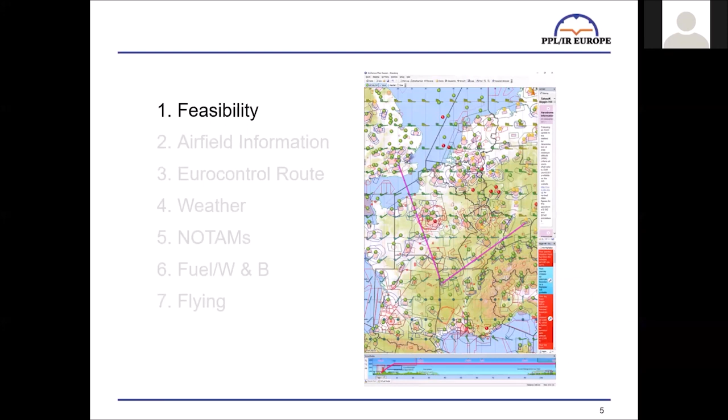First step is just the general feasibility. Can the flight be done given the fuel and the weather and distances and so on? Secondly, airfield information - things like customs availability, opening hours, fuel availability, that kind of thing. The Eurocontrol route, which historically has been the most difficult thing about flying IFR in Europe, but now has been made very easy by various tools.

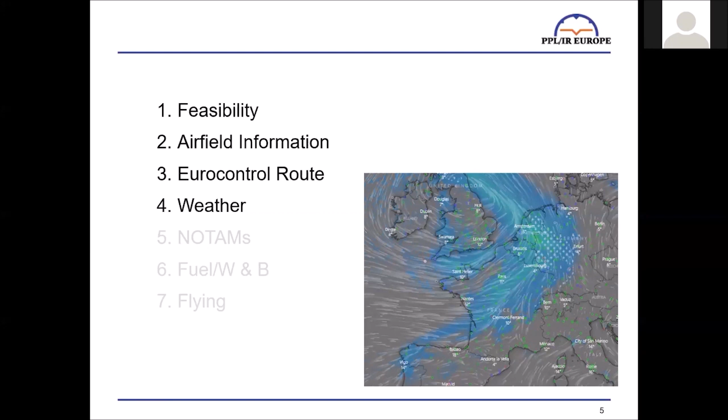Weather, and we'll talk about that and how easy that's been made by various tools. NOTAMs, same thing, used to be a huge problem, now it's made very easy by various tools. Sorry to keep repeating myself. Same thing with weight and balance. And then we'll talk a little bit about flying at the end.

So, taking a scenario, let's say the boss calls me up and says, right, I need to fly from Bingen to Stuttgart, dropping my wife in Clermont-Ferrand with a quick turnaround. What time can I set my meeting up in Stuttgart? That would be not an untypical thing for him to say to me at 7:30 in the morning, expecting to be a meeting in Stuttgart by the early afternoon.

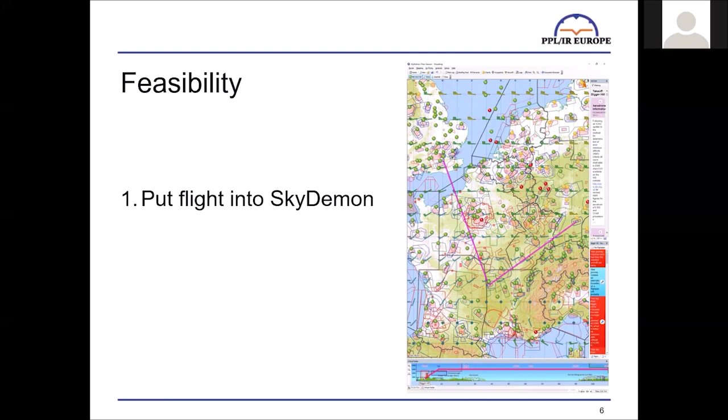So the first thing I do is I just put the stopping points into SkyDemon. Well, in this case, I'd probably put Bingen to Stuttgart and then rubber band it to Clermont-Ferrand, just to get an idea in my head. I'd look at the log and get the times and distances from that. And then I just add on.

I know that Eurocontrol is unlikely to add more than 15% to my route, and indeed, as we'll be talking about later, I'm unlikely to fly even that 15%. So I have 15% for Eurocontrol, 30 minutes on the ground, 70 litres for climb, 200 litres for hold and alternate. And I come out with a feasibility answer, a yes or no, generally speaking, in about 60 seconds.

So he calls me up, I say, hold on a second, blah, blah, blah, blah, and then, yeah, I think we can do that.

What would typically happen is he would say, okay, plan it and let me know when we're going. So the first thing I do is go to the airfield information for those airfields. There are lots of places to get it from, flight planning apps, websites, Acukwik, Jeppesen, many places. But they all use the AIPs as their source material, which is already at your fingertips, in my case in SkyDemon, but in various places you can see the AIP.

So I tend to go back to the source material. On my SkyDemon, I keep the whole of Europe offline, already downloaded on the iPad, so it's just there whatever the circumstances, both in flight and if I'm in a poor signal area. I have to remember to do it for departure, destination, and alternate airfields.

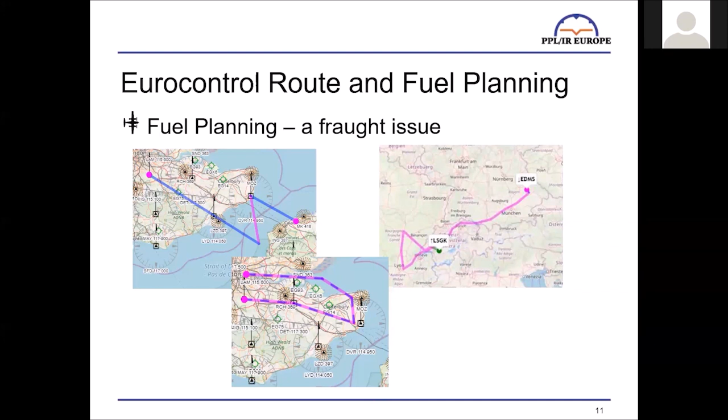This only really matters if you're doing a long route. But for example, I planned a route from Liverpool to Gdansk, and the route took me a very odd way over the North Sea, which I didn't have enough fuel for, but it was perfectly clear that I would get a straight line across the North Sea, which I would have fuel for. So it can become a real issue that you have to take decisions about.

Windy.com is both a website and it's available on apps, and it's free to use, and you can set it up to have aviation weather. For example, the things I'm about to show you - rainfall, visibility, cloud base and wind, the four main things we're interested in - you can set it up to show those. You can also set up pickers to show you what the forecast is at a particular place.

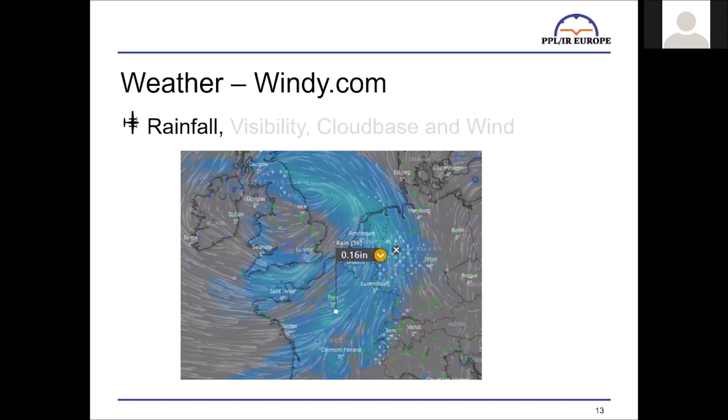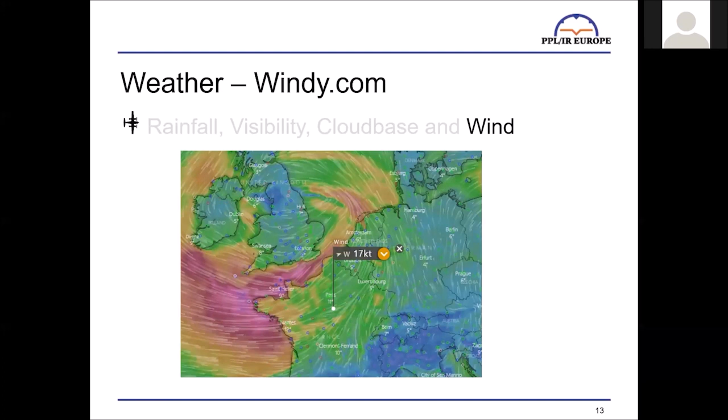And then you have a time slider scale, so you can see how the weather system is moving and so on. In this case, I can pick up the rainfall, the visibility, the cloud base, and the wind. The wind one can do at any level or altitude you choose, including the surface. So you get a very good picture both of en route winds and any likely problems with wind at departure and destination and alternate fields.

So windy.com, as I say, it's available on website and in apps. It's free of charge, and as far as I'm concerned, it's completely changed how we do aviation weather. It enables you to visualize and see how systems are moving, so you can decide it's better to go in the morning than the afternoon, or whatever it might be.

The second system that has enabled us to visualize weather is Gramet. There are a couple of possible sources of Gramet. The one I recommend is from Autorouter, and it comes free with Autorouter. If you've done your flight planning through Autorouter, it automatically picks up the plans and routes. For example, if you put in your route 4 or 5 days in advance, you can keep an eye on it just by putting in Gramet route 1, or whichever number the route is, over the days, and it shows you if there's any change.

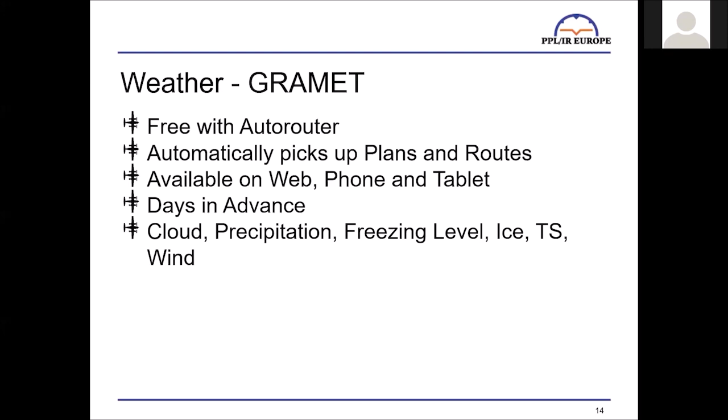And when you've put it in as a plan, you just say Gramet 1, and it automatically gives you the Gramet for your plan. It's available on web, phone and tablet, and you can do it days in advance. It gives you cloud, precipitation, freezing level, ice, thunderstorm activity and wind, all in a cross section like this. This particular one is going from Fair Oaks to, I think that's Gstaad, and you can see the weather that you're likely to be climbing up through and then flying in.

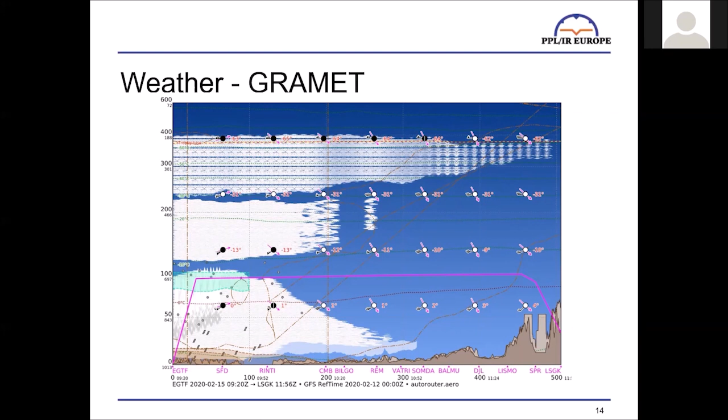The green area is icing, the little parallel lines are rain, and you can see magenta lines for the track compared to the forecast wind. Hugely valuable resource, enabling you to picture what the flight's going to be like, and usually pretty accurate, not 100%, but pretty good.

And then finally, the Golze system, which is both for pre-flight and in-flight weather. You have a little box, either which you carry into the cockpit or is installed in the cockpit, and it gives you TAFs, METARs, precipitation, cloud, lightning, wind and temperature. And on here you see an example.

If you have it plumbed into the aircraft, then it also gets your route from your navigator and puts that on. That's what the green line is. And this is showing magenta is lightning strikes, red and purple and yellow, orange and so on are amounts of precipitation. The grey is cloud without precipitation.

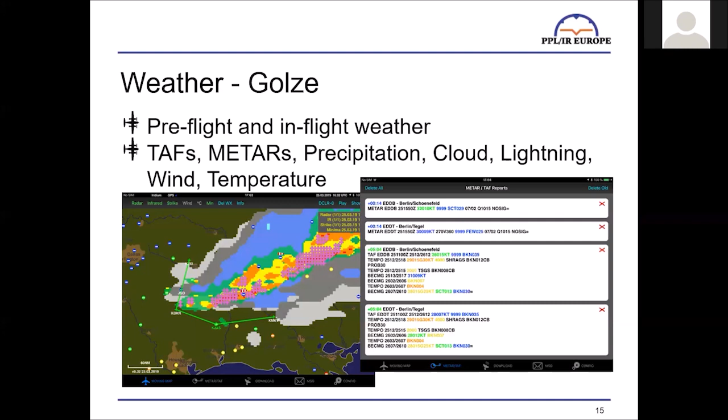It also gives you wind at different altitudes as well as temperatures, and you can pick up TAFs and METARs. It's a very, very well engineered product. Although it works on Iridium, which is an expensive technology, the author, Sebastian Golze, has done an excellent job at compressing the data so the costs are actually relatively low. I fly a lot, and I very rarely have a monthly bill of more than about 30 euros, and that's flying a lot. If you just do the occasional trip, it will almost not be noticeable.

Do beware that the radar data is always out of date. It's a minimum of about 4 minutes out of date, and depending on where in the cycle you're looking, a maximum of about 20 minutes out of date, because there's a download every 15 minutes that takes 4 minutes to process. So the first time you see it is the situation as it was 4 minutes ago, and then as the 15 minutes decay, it becomes older and older. So you can't use it as a tactical way of avoiding thunderstorms, but you just know where they were between 5 and 20 minutes ago.

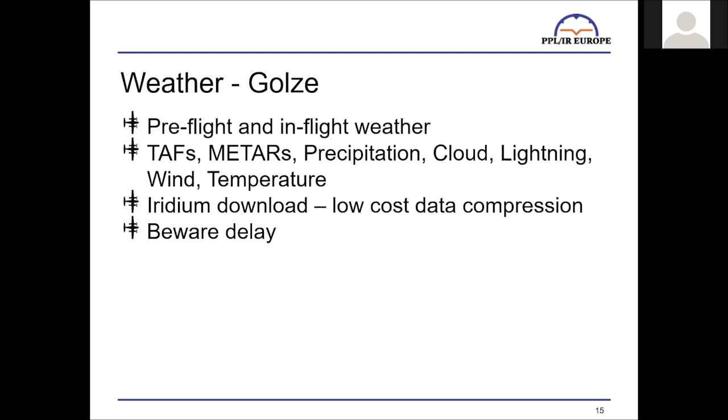It gives you low-cost in-flight SMS texting as well, so if you want to text home and give an ETA or whatever, you can do that. In my opinion, it's the best thing and the best value addition to the IFR pilot's toolkit for many years, and I recommend everyone to have one of these boxes. I'd almost say it no longer makes a lot of sense to do IFR touring without one, and they're not hugely expensive, a small number of hundreds of euros, so very, very well worth buying.

And I should say, I have no interest in the company.

I'm just a satisfied customer, so I'm not pushing it from a commercial point of view. I'm just recommending it as someone who thinks it's wonderful.

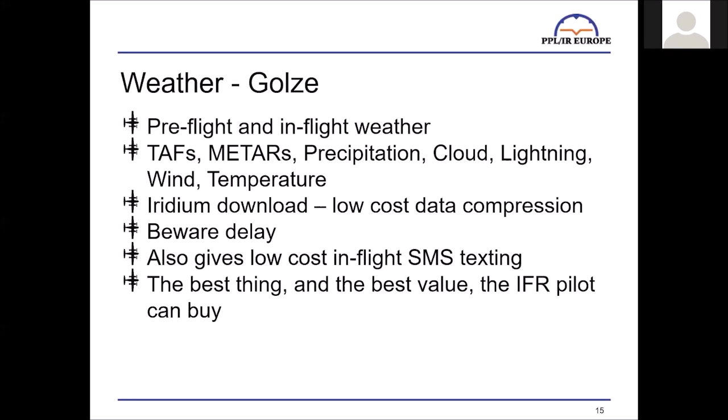Moving on to NOTAMs, I get graphical and textual NOTAMs from SkyDemon. There are many other sources for getting them, and all the flight planning programs have them, some better than others. Some only show lateral extent, whereas SkyDemon and others also show you the vertical extent.

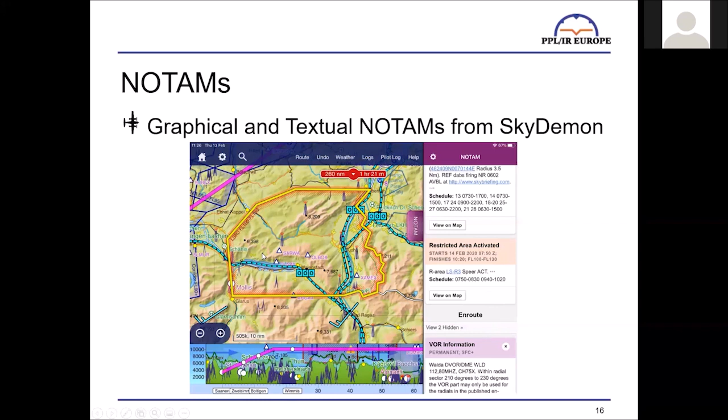They're timed, so you can see when they're coming in and going out, and it's a very easy way to look at your whole route. For example, in this one, you can see my magenta line goes here, and I've come down and had a look at what this NOTAM is about. You can see the words down here, but if you put the mouse over them, they pop up the contents. So it's made NOTAMs go from an hour-long exercise of sitting in the crew room reading hundreds of pages of tightly printed A4 sheets to just having a quick glance at the graphical view, seeing which ones are relevant, and moving on.

Also, using SkyDemon, and I'm sure the same is true for many other flight planning and in-cockpit flight systems, they provide in-flight alerts and warnings. So just like they tell you about controlled airspace, they'll say you're approaching a NOTAM and warn you what it is.

Fuel and weight and balance. Again, many apps—SkyDemon, RocketRoute, AutoRouter, ForeFlight—give you weight and balance calculations, and I'm sure they're absolutely fine. Personally, I use Excel because I've programmed it myself, so I know exactly what it's telling me, and I'm not relying on other products to do it. That may just be paranoid on my part, but I like to know exactly what I'm looking at.

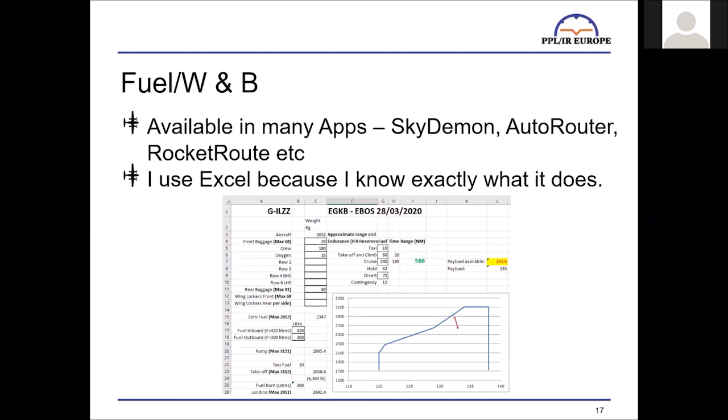But all of them are much the same. You can see the red line shows me takeoff and landing weight and balance, and shows they're both within the envelope. Many apps do exactly the same thing, and you may prefer to use one of those. It's just me that likes Excel, but I can do it very quickly—probably a tiny number of keystrokes, because things like my own weight and my flight bag are already in there.

So it's just a question of putting in, and I normally take off with full fuel, so it's usually just passengers and their baggage, and we're off. I also save what I've done so that if I'm ramp checked, I can show the ramp checker that I did the weight and balance and that it was in limits. The whole process takes about 15 seconds, as opposed to the many minutes it used to take when I was doing this commercially, with everything on paper and multi-carbon sheets.

In my personal experience, slots are becoming more common, probably due to the shortage of ATCOs around Europe. Having said that, we're currently in lockdown with almost no aviation activity in Europe. What will happen when everyone comes back from furlough—whether it'll be better because there are fewer airliners, or worse because there are fewer ATCOs—we don't know. But going historically on the way it's been over the last couple of years, it's getting increasingly common to get a slot.

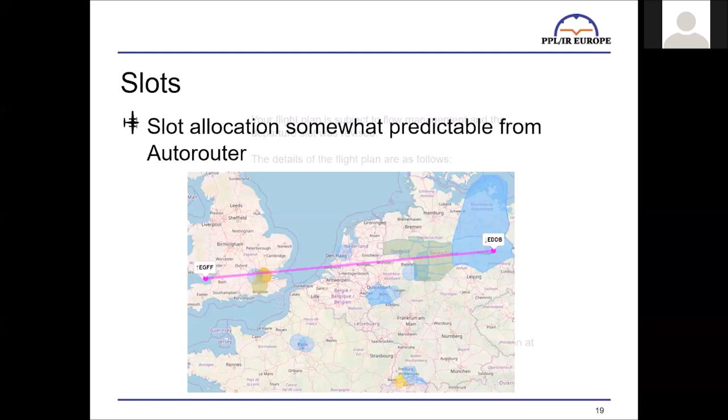AutoRouter does warn you about where potential restrictions would be. Each colour represents a different length of time, from maybe 10 minutes to 2 hours or so, depending on the strength of the colour, so you can get a rough idea of what the restrictions would be. In this case, you could possibly plan a route further south to avoid those delays, but even further south you've got that area between Koblenz and Düsseldorf, so it may or may not be worth replanning.

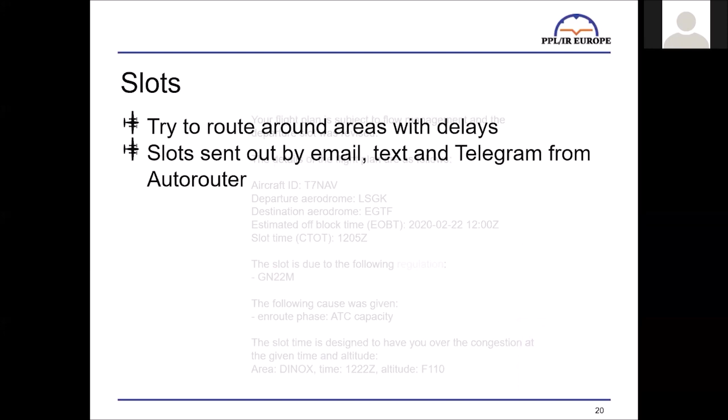Slots are sent out by email, text, or Telegram from Autorouter. I'm sure each of the systems has its own way of sending them out.

Just to warn you, if you get a slot - let's say you're planning to go at 12 o'clock and you get a delay until 1 o'clock - if you try to be clever and refile for 11 o'clock hoping you'll get a delay back to 12, the system seems to know better and will give you a delay till 1:30 or whatever. So filing an earlier time, having already filed, is not usually a good idea.

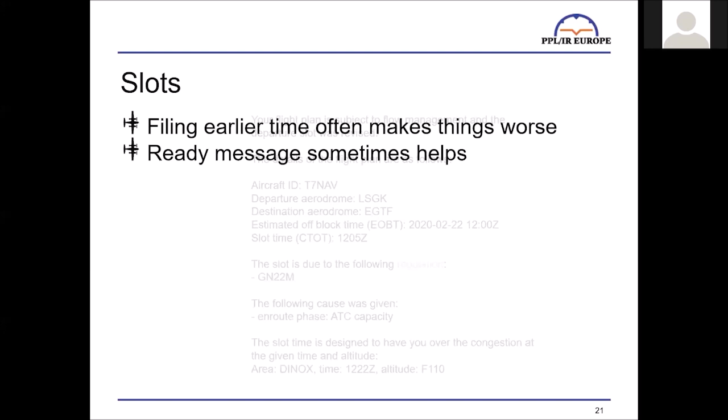Doing it based on what Autorouter tells you is the likely delay might be a better idea. And sometimes sending a ready message - you can do it directly or through ATC - that sometimes improves the slot, though it often doesn't.

I won't say annoyingly, because it's sometimes helpful, but quite often you'll get a whole series of slots. First you'll be told there's an hour's delay, then 45 minutes, then 30 minutes, and then you'll get one saying you can go now.

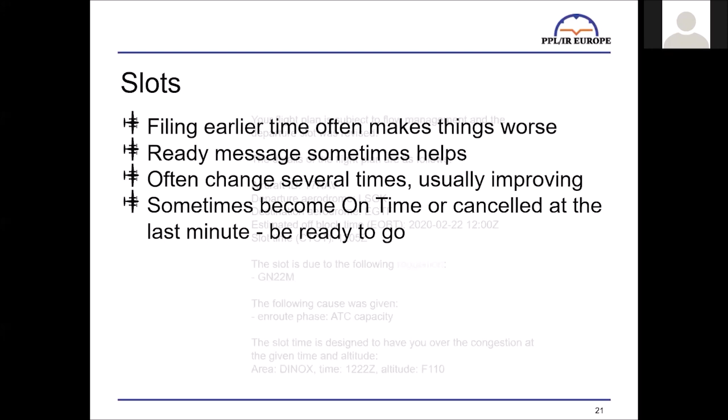If you're ready to go, sitting there ready to start the engines, that's fine. But if you've let the passengers go off to the cafe, it's more of a problem.

So you can freeze the slot if you want to. Let's say you've got a delay of half an hour - you can put in a freeze command, which means you can just tell the passengers to be back at a certain time, ready to go for the slot. It's horses for courses - you make the choice for each flight as circumstances suggest.

You can always consider, depending on the weather, route and circumstances, if you get a very long delay. Historically I've had a 5-hour delay, which actually makes the whole trip not worth doing.

Then you can consider cancelling IFR and refiling VFR, which, given all the facilities offered by SkyDemon, isn't such a silly idea, depending on your aircraft type and the nature of the airspace. But if you do that, bear in mind it'll be a much more tiring flight, as you're working out as you go the restrictions, airspace, who to talk to next, and all the things IFR protects us from.

Now, talking about the flying itself, some people are nervous about ATC. My experience of ATC is that, although there have been some exceptions in my long history of flying, mostly they are helpful and cooperative.

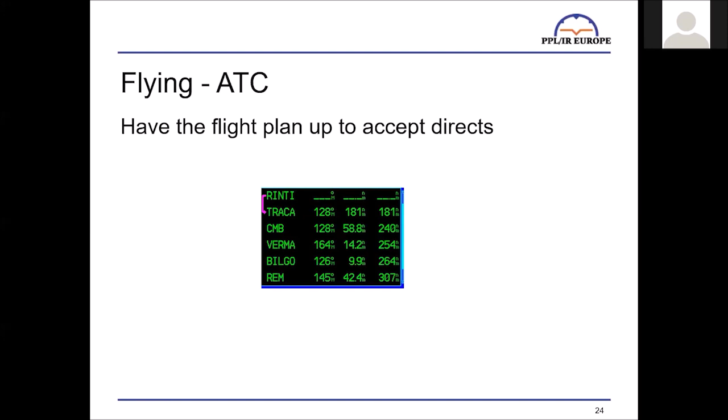The downside is, of course, you have to be ready to accept the directs, and I strongly recommend having the flight plan up on your GNSS unit, so that if you're flying from RINTI to TRACA, as we are here, and you're told direct to Reims, you can just highlight it, click direct, and off you go. That's always the first place to look when you're given a direct - your GNSS flight plan.

A problem can arise, particularly when you're listening to a controller whose language differs from yours and who might have an accent, as to - if you're not familiar with all the waypoints, or it's an unusual waypoint - what have they actually said?

So on the radio, SAMAX, XAMAX, SAMAC and SANAC all sound pretty similar, and so there can be confusion, either because two of those exist or because you don't know which one you're looking for.

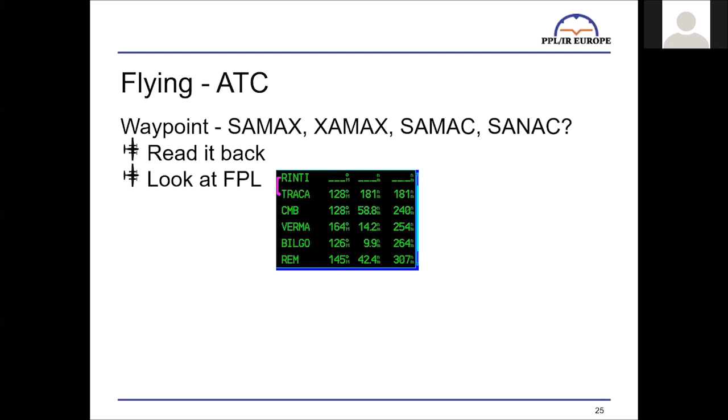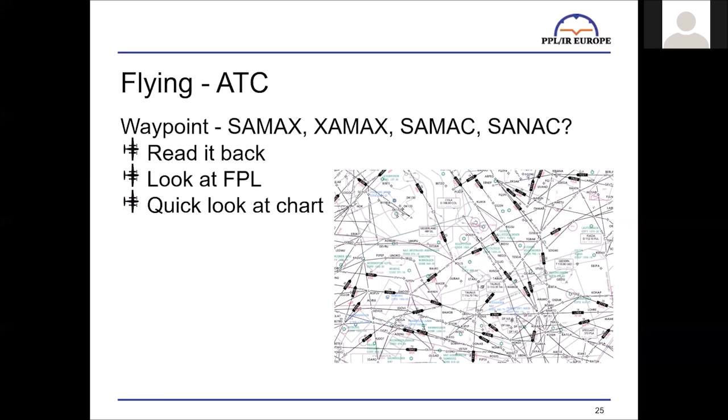The first thing to do, in my suggestion, is read back what you've heard, because ATC can be quite busy and you don't want to take up unnecessary time. If you can work it out for yourself in a few seconds, so much the better. So read it back, look at your GNSS flight plan, can you see it there? If you can't, look on the chart in the general direction where you expect it to be, towards your destination, and have a quick look round to see if it's an obvious place. And then finally, go back to them and ask them to spell it.

They never mind spelling it, it's never an issue. You just go back, ask them to spell it, they spell it out, you put it into your GNSS as a direct, start flying it, and then once you've started flying it, you can find it on the chart, see where in your flight plan it should fit, and insert it into your flight plan, at which point the aircraft will automatically go from direct to sequencing within the flight plan.

That's something that comes up very often in new, inexperienced IFR pilots, is what to do if you're just given a direct to a waypoint and nothing beyond it. Some people think they're supposed to hold when they get there, but that's not the case. If the flight plan's on the route, on your original route, like in this example here, then you just continue on the flight plan route. That's what ATC is expecting you to do.

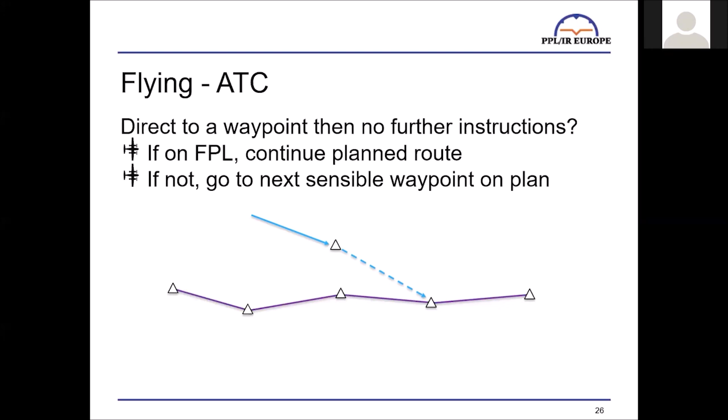If it's not on your route, then unless you hear any different from them, just continue to the next sensible waypoint on the plan. So in this case, continuing in more or less a straight line to somewhere a bit further on the plan. You wouldn't do a hard right turn to join the plan adjacent, you just continue. That's what they're expecting. But of course, if in any doubt, ask what they are expecting. Generally speaking, it will be to a point on the flight plan, and you just continue on your flight plan route until you hear otherwise.

Just a little bit about large TMAs - London, Amsterdam, Frankfurt, places like that. Expect a lot of vectors, particularly in all three of those, but I'd say particularly in the London TMA, you just never fly the route you plan, it's always vectors. A couple of years ago, I was given a SID out of Biggin Hill and I flew it, and I was never given a vector. It was so surprising, because that had not happened to me in the previous 30 years, that I actually had a conversation with the ATCO about it.

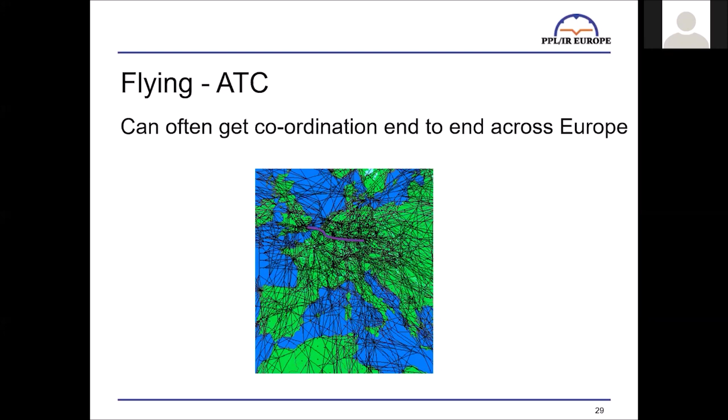Some ATC provides weather assistance, particularly in Germany, but there are other places too, where if asked, they'll say there's a CB on that route, or suggest you turn left, or whatever it might be. It's not usually offered, but if you're short of fuel, you can ask them to coordinate for your whole route, asking their colleagues further down the line if you could go via a certain point to get in a straight line. If the answer comes back no, you might want to think about diverting. But if it sounds like you'll get a direct routing, you can get reassurance about that. It doesn't always happen, it's horses for courses, but it's always worth a try.

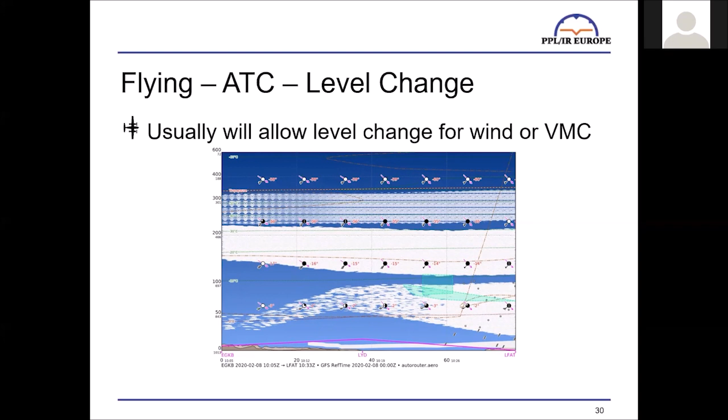Usually, particularly at our levels where there isn't a lot of traffic, you can ask for level changes. You must never make a level change unless you're cleared, but you can ask for one either because you've got a much stronger headwind than expected, or to take advantage of a tailwind, or to stay out of bumpy cloud for your passengers' sake, or to avoid icing. So you usually can ask and will be granted a level change in the kind of levels we're talking about, between 80 and 240.

Sometimes in busy TMAs, there just isn't the time or capacity for that. Bearing in mind the big jets are down at our levels too in the TMAs, you just have to suck it up and take the levels you're given, unless you're actually icing or risking very serious turbulence.

Another thing people often ask about is descent and how to liaise with ATC. You need to plan your descent a way back, either using technology—for example your navigator may have a mode where you say, I need to be at this level by this position, and it tells you when to start the descent, which is quite common these days—but with older tech, you need to do it by mental math.

Unpressurized aircraft need to descend at a minimum of 500 feet a minute—that's the IFR rules—and you don't want to exceed that for your passengers' comfort and ears. Therefore you should plan all your descents at exactly 500 feet a minute. Obviously that doesn't apply to pressurized aircraft.

The way you do it is you calculate the altitude change you require. At 500 feet a minute, that's 2 minutes per 1,000 feet, so you get a number of minutes. Let's say you need to go down 5,000 feet, that's going to take 10 minutes. You know your speed, say 120 knots, 2 miles a minute, so if you have to go down for 10 minutes at 2 miles a minute, that's 20 miles, or whatever it is. You can work it out quickly and get the point from which you want a descent.

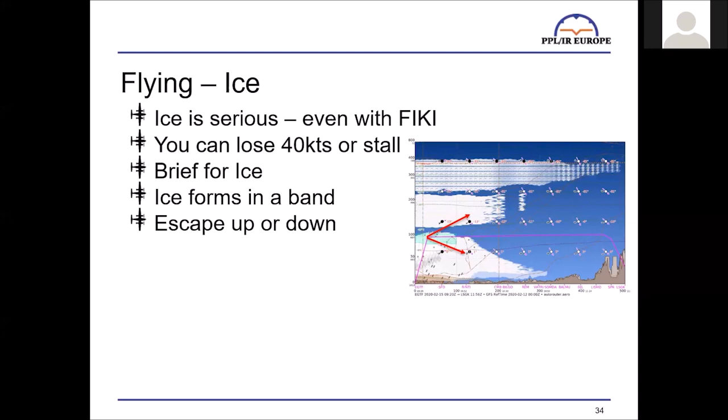So there's only going to be a few thousand feet which is ice-bearing, and therefore you can escape up or down. You should always consider - if, for example, you can see blue sky above you, that may be the better way to go. And if you've picked up some ice in the green area and climb above it, the ice will sublimate off in the sunshine. It's not a question of it always staying there because it's colder - it will dissipate, but slower than if you descend below the 0-degree isotherm.

Generally speaking, if you say you are icing, ATC will take it very seriously. You don't have to declare urgency or emergency. But if they don't take it seriously, or your situation is beginning to get grave, don't hesitate to declare an emergency - it is an emergency. If your aeroplane isn't flying properly, it's an emergency. And once you declare an emergency, they will essentially do for you whatever you need in order to get you out of it. There will be paperwork to do afterwards, but paperwork is always better than crashing and dying.

Something I sometimes see people forgetting is to put on anti-ice and de-ice measures when they should. It varies from aircraft to aircraft, but make sure your pitot heat is on, prop heat, alternate air. It's easy enough to remember to do the wing de-icing, but do remember for your own aircraft type what else you need to have on.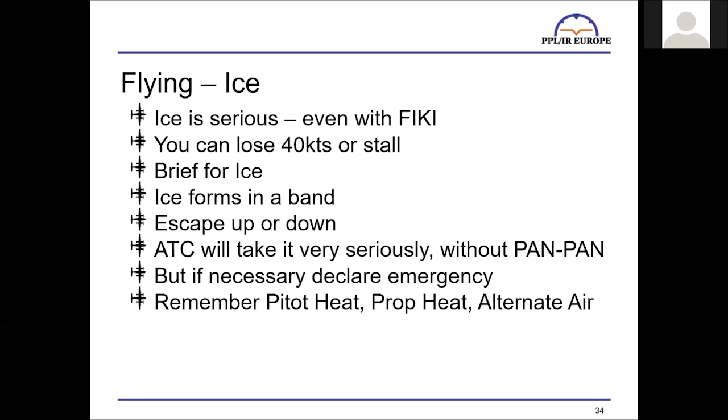A little bit on thunderstorms, because that's another big worry when we're flying IFR. Use some kind of detection.

If you're above the clouds, then you could - and this is the most common way to interact with a thunderstorm - see the kind of picture you see here. But otherwise, onboard radar, the Golze system I mentioned earlier, storm scope, or as I said earlier, in some countries you can ask ATC. But one way or another you need to know where they are.

Remember when we talked about the Golze system, I mentioned there's a delay. There's a play function within Golze that allows you to watch which way thunderstorms are moving, so you can forecast for yourself. If it was there half an hour ago and a quarter of an hour ago, in all likelihood it will be here now. It's not great, but it helps. But also remember that in some places, particularly in the Swiss Alps, or the Alps generally, thunderstorms don't move - they just appear and disappear in place. So the play function isn't going to help you with that.

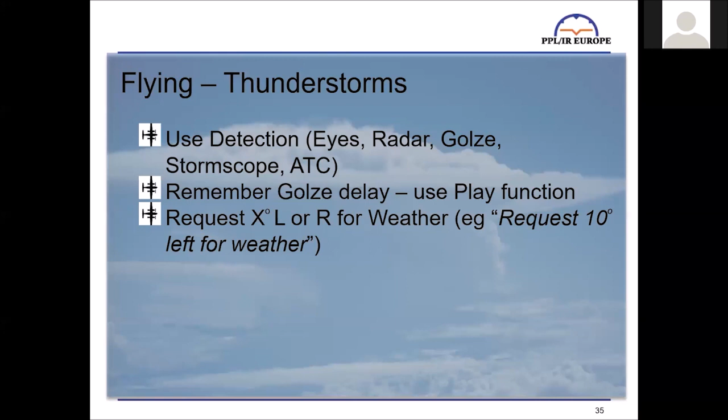What you should do, say we have the picture you can see in the background here, is ask for so many degrees left or right for weather. So you say, request 10 degrees left for weather, and nearly always they will grant it. Sometimes they will say, how long do you need that for, because they need to do their own planning. And sometimes they might say, can you take a right turn? But generally speaking, they do what you ask.

Whatever happens, do not go into one. If ATC aren't being cooperative, you may just have to announce your intentions and turn away, leaving them to sort out the mess, because you shouldn't be putting your and your passengers' lives at risk by entering one of these things. Again, it will end up in paperwork, but paperwork is better than death. So don't go into one just because ATC tell you to - the responsibility remains yours.

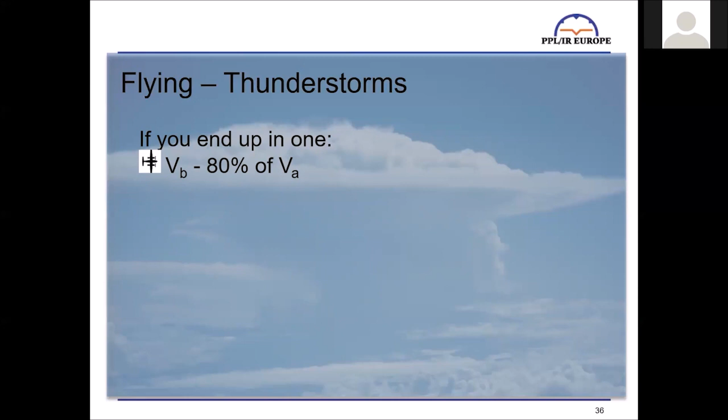If you do end up in one, the top of the green band on the ASI is what's called VA, and the penetration speed, generally speaking in the kind of aircraft we're flying at the kind of speeds we're flying, is about 80% of that. So bring your speed back to 80% of the top of the green band. Turn off the autopilot and try to remain calm and focused - otherwise, if you start getting panicked, you're likely to be in a much worse position.

Make gentle corrections to heading and altitude. Don't obsess - no one else is going to be fool enough to be in there with you. So if you do go up and down by 1,000 feet, or find that because of turbulence your heading changes, you're not going to hit anyone. Just gently put it back to the heading and altitude you want, but never with a lot of control force. Although in America and Africa these things can break up an aircraft, in Europe they're never that bad. It may be very nasty indeed, but if you do what I've just said, you will survive the experience.

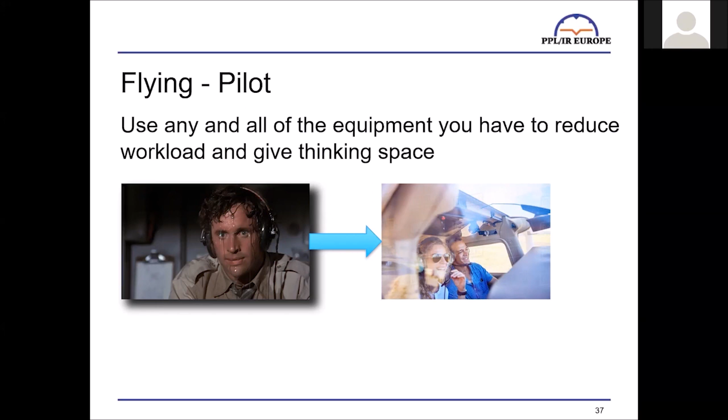Now moving on to the equipment you have. Use all the equipment at your disposal to reduce the workload and enable you to think - you're thinking about fuel, weather, and all the other things you need to think about. So use the autopilot as much as possible. I'd say keep your hand flying skills up by occasional practice, but essentially apart from that, use the autopilot all the time so you can use your brain for other things.

Use roll steering, which keeps you on your planned route even as you go through a waypoint - although you still need to monitor what the autopilot's doing, you put less attention into coming from nav mode into heading mode and back into nav mode at each waypoint. Use VNav mode if you have it - it gives you vertical guidance as well as lateral guidance. Use a moving map, whether IFR or VFR, so you're always orientated and can see controlled airspace, procedures and so on in front of you. Keep the waypoint list on the navigator so you can quickly do a direct-to points further ahead.

Use the fuel planning function on the navigator if you've got it. If you don't, you have to be working out your fuel all the time. If you have it and you know you can trust it, and it's telling you your arrival fuel for example, then you can put much less mental effort into fuel planning. Cross-fill, if you've got more than one GNSS, makes life easier.

And flight stream from something like Garmin Pilot or ForeFlight, so it goes straight into the box. All of these things are just going to reduce the mental work you need to put in. So use them. If you don't have them, you can still of course fly. I'm not saying you need all that stuff, but you might need to think more about your workload.

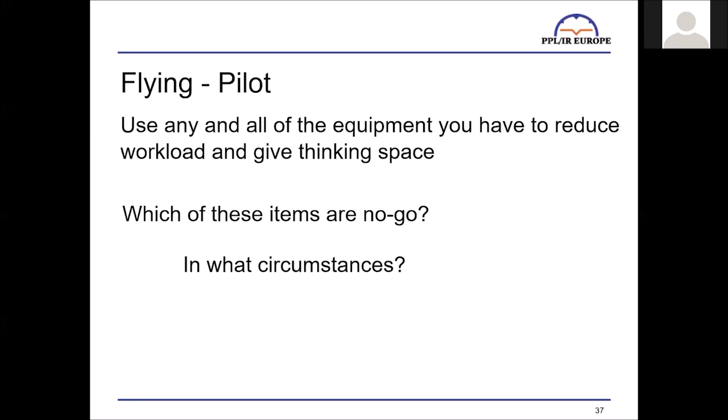And maybe possibly shorter trips or more benign weather or whatever. You also need to think which of the items are no-go items, and that may well be determined by circumstances. So for example, if you're flying VMC, even if it's IFR, you need the autopilot much less than if you're flying in hard IMC the whole way.

Right, moving on to plates. Constant question arising on the PPLIR forum and elsewhere: which plates do I use? Do I use Jeppesen or do I use AIP? I'll be talking a little bit about Navigraph as well in a moment, which are Jeppesen plates. So there on the left is a Jeppesen plate, then the German AIP plate, and we'll be talking about Navigraph as well.

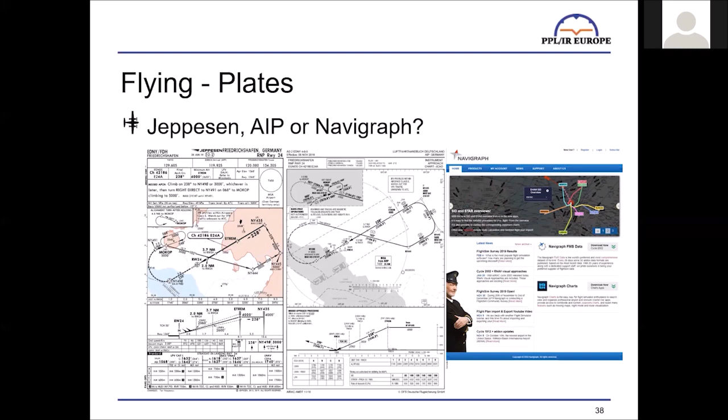First issue is one of consistency. Here I've just got five examples of different AIP plates, and you can see that they're all different. They all have their information in different places on the page. So if you're flying all over Europe, you either need to familiarize yourself with each country you're going to, or give yourself plenty of time to brief as you look for that snippet of information on each sheet.

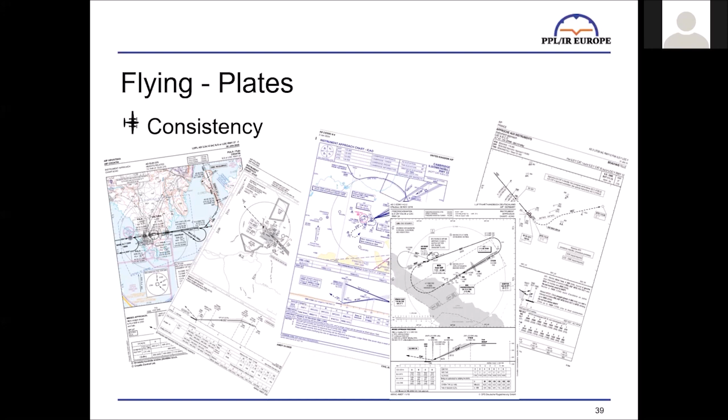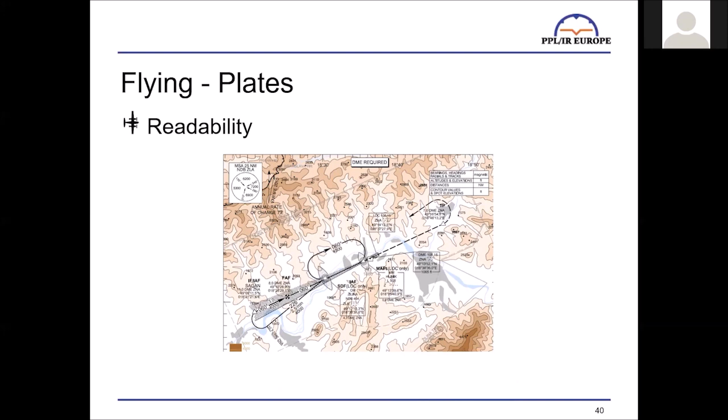The AIP plates are not originally written to be used in flight. They're written so that people like Jeppesen can produce flight-ready systems. So readability can be an issue. This one I happened across, the written word is almost indistinguishable from the background topography, and it makes it very hard to read what you're supposed to do. Whereas a Jepp plate, you would never have something like that.

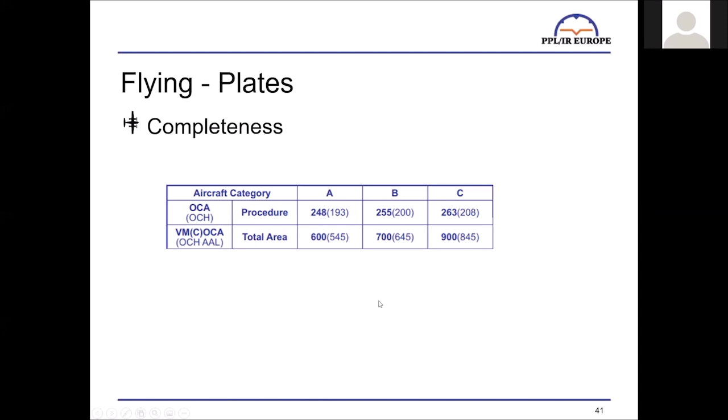So AIP plates are not complete. Not all of them, depending on the systems you use, can be georeferenced, but obviously it makes life a lot easier if they are. So here's an example of an AIP plate in SkyDemon, georeferenced with an aircraft moving over it, and similarly a JEP plate in one of the JEP products, georeferenced there.

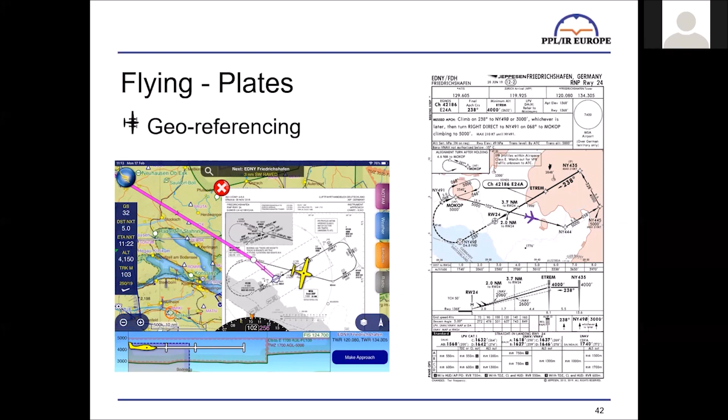Then there's a question of presentation. Are you going to show it in your GTN, your G500, on an iPad, or on paper?

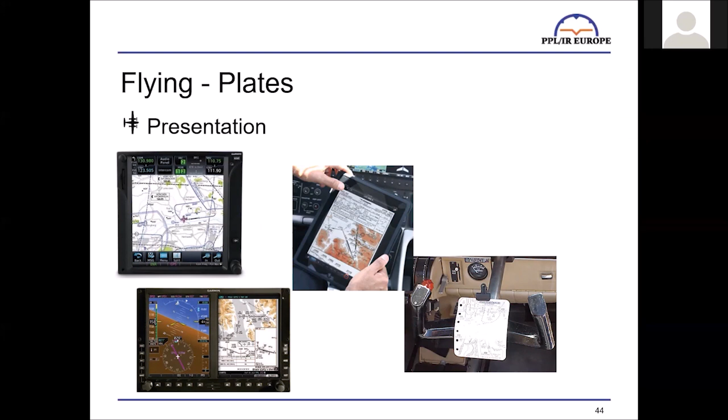It's a matter of personal choice, but my preference is iPad, your preference may vary. But of course, the other side to all this is that everyone's going to want JEP, except when it comes down to the cost, because JEP costs a lot.

Typically in Western Europe, I think it's around 600 or 700 euros a year. It's a lot of money. Of course, the AIP plates are free, you can just download them in your flight planning app, but they have the disadvantages I mentioned of inconsistency and lack of legibility and so on.

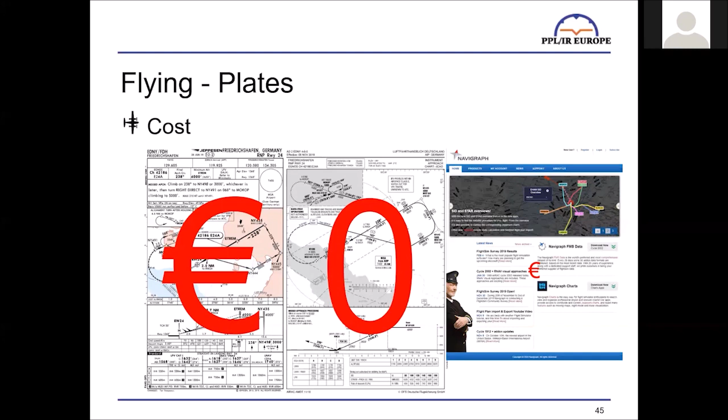So some people find the happy compromise is to use Navigraph, which is very cheap, about 60 euros for the whole world per year. It's a trivial amount of money, but it has the disadvantage that you can't use it in flight. You either have to PDF or print out the ones you want to use, so that can be inconvenient.

So in terms of bang per buck, if you want to keep your costs down, my recommendation is to use Navigraph, get the PDFs that you expect for your departure, destination and alternate airfields onto your iPad as necessary. And then if you have to divert somewhere different, needs must, move across to the AIP. But if you can afford to use JEP, that's obviously preferable.

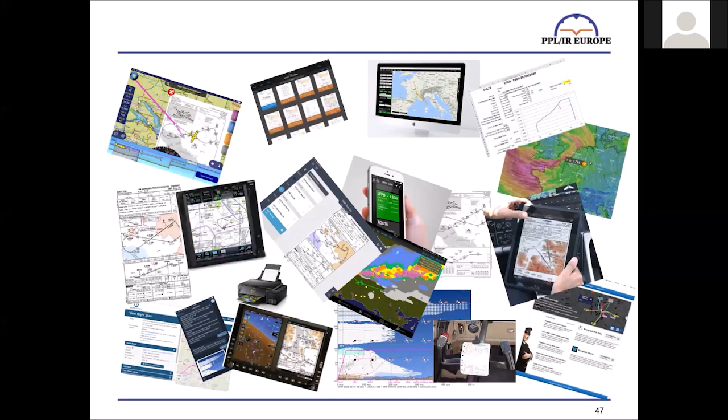So the bottom line is I've talked about many different options for lots of different things, and the point I'd like to make is there are no right answers. Some people swear by ForeFlight, some people swear by Garmin Pilot. Personally my preference is SkyDemon and JEP-FD. There are no right answers, and the same is true for all the other things we talked about, flight planning and so on. Just whatever works for you.